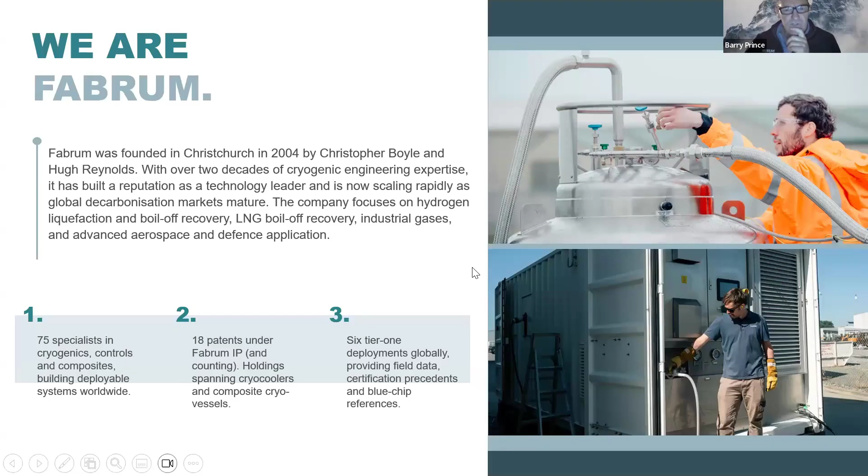So just to give you a bit of an idea of the sort of work that we do in the hydrogen space and our expertise, I'm just going to show a recent project that FABRUM was involved in. So this is a bit of drone footage from a mine site in Western Australia. The client for this project is a company called Fortescue, a big iron ore mining company based in Western Australia. They wanted to demonstrate that they could decarbonise their mine site. Specifically, they wanted to demonstrate they could run their big haul trucks on liquid hydrogen. To do that, they needed a liquid hydrogen liquefier on site.

So Western Australia is a fairly remote place. Perth is the capital city of that state of Australia. Perth is the most remote city in the world. And this mine site's about 1,000 kilometres north of Perth. So very remote location, very punishing environment. The temperatures regularly go above 50 degrees Celsius, and it's a very dusty environment.

So what you're looking at in this photo, in the background under that canopy, are electrolyzers. They're being fed electricity from a solar array, so they're producing green hydrogen. That's fed through a pipeline to the plant at the front here. That's the hydrogen liquefier that was designed and manufactured by FABRUM. So all of the cryocoolers that are doing the cooling of the hydrogen are in the 3 containers in the foreground, and the containers just behind that have all the heat rejection and control systems.

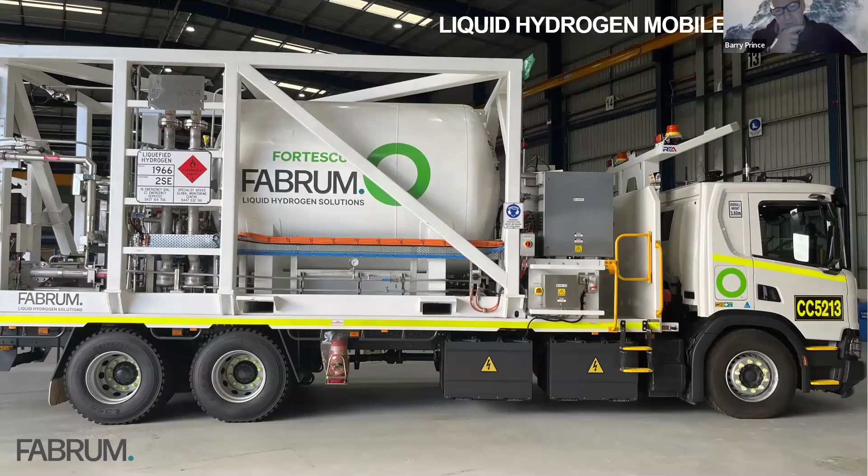And the primary vehicle that it is refueling is this. This is a liquid hydrogen mobile refueler. It carries about 600 kilograms of liquid hydrogen, and it has all of the infrastructure on board for doing liquid transfers. It's built into a standard 20-foot ISO frame, so it can be easily transported or relocated. And this vehicle will then refuel liquid hydrogen into a couple of other vehicles.

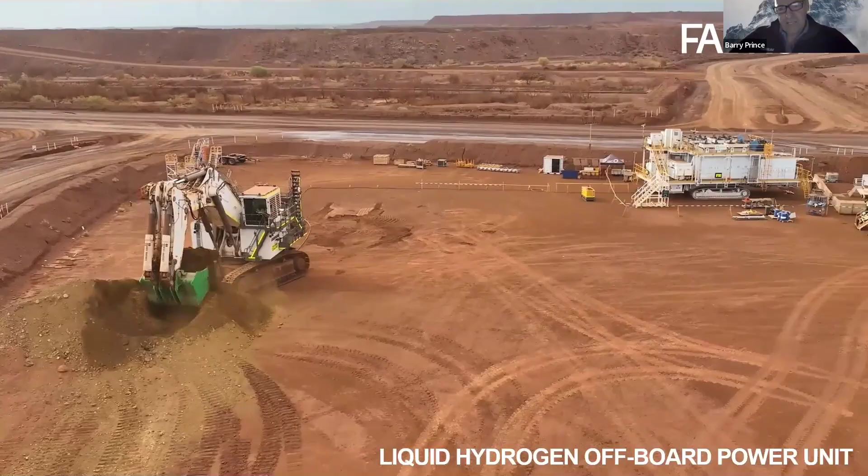Firstly, the vehicle on the right-hand side of this, it looks maybe a bit more like a building than a vehicle, but you can see it's on tracks there. It can travel around behind the excavator on the left. That excavator is 100% electric powered and, difficult to see, but there's a big power cord running along the ground to the vehicle on the right. That's called an off-board power unit, and the off-board power unit has storage of about half a ton of liquid hydrogen that is feeding fuel cells, producing about 1.3 megawatts of electricity to power that electric excavator.

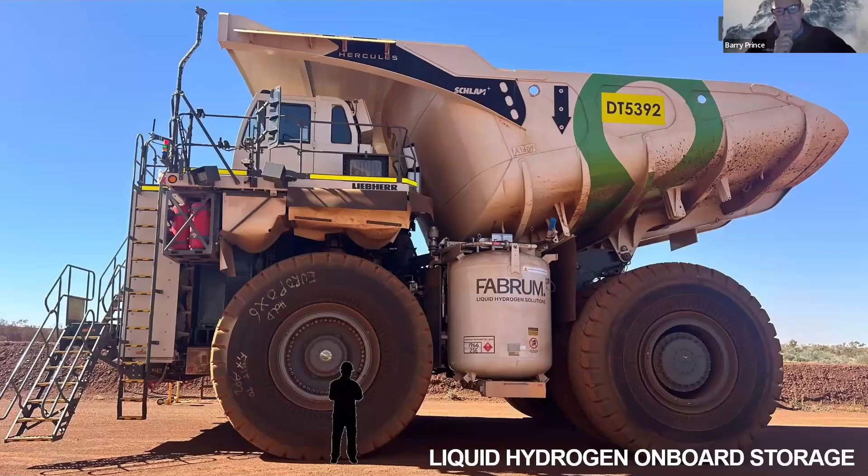But ultimately, this project was about proving these trucks could run on liquid hydrogen. So this is a 300-ton haul truck. This truck would typically consume about 2.5 to 3 tons of diesel in a 12-hour shift. This truck running on liquid hydrogen will do that 12-hour shift by consuming about 500 kilograms of liquid hydrogen. And that hydrogen is stored in 2 of those FABRUM tanks, one on each side of the vehicle.

And so, as I say, this is quite a nice demonstration of the sort of work that FABRUM gets involved in. Everything in this project that had anything to do with liquid hydrogen was designed, manufactured, and deployed by FABRUM. So that includes the hydrogen liquefier plant, all of the liquid storage, the liquid transfer systems, dispensing and refueling systems, onboard storage, and the storage delivery systems.

So if you look at the products that FABRUM manufacture, they're largely underpinned by 2 technologies that the company has developed. So I'm just going to talk about them on this slide. So firstly, on the left, we have a proprietary cryocooler. In the middle of that circle, you can see that cryocooler. It's essentially a very powerful refrigerator, works on the same principle as your domestic refrigerator at home, compressing and expanding a refrigerant gas, but much more powerful. And that underpins all of our products that deliver cooling power. So it's nitrogen and oxygen liquefiers, it's natural gas liquefiers and boil-off gas management systems, and of course our hydrogen liquefiers and boil-off gas systems.

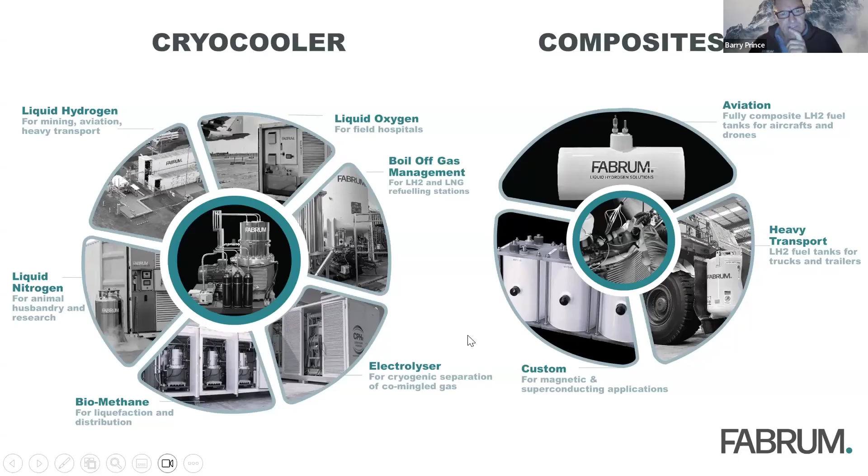On the right-hand side of this slide is the other core bit of technology that FABRUM has developed, and this is manufacturing techniques that enable us to build these super lightweight storage vessels for liquid hydrogen. That, of course, is what we're going to get into in a bit more detail as we roll through this talk. So before we get onto the tanks, what are the other products around the cryocooler that FABRUM are producing? Because these do also have some relevance, as we'll see, in the aerospace sector for hydrogen powered flight.

So firstly, the hydrogen liquefiers. We've talked about the larger one at the top left of this, the system that's installed in the Pilbara in Western Australia. To the right of that at the top is a system built into a 40-foot shipping container that will produce up to 75 kilograms of liquid hydrogen a day. That system pictured there is currently being installed in Germany at the Karlsruhe Institute of Technology at their energy lab. In fact, it's at the heart of their energy lab, producing liquid hydrogen that's underpinning all of the R&D that they're doing for cryogenic hydrogen at that site.

Bottom right is a smaller scale liquefier that we produce. We call it a development scale, and it can be configured to produce from 3 to 20 kilograms per day. The liquefier pictured there is operating in Kemble, Cotswold Airport in the UK, actually the site where ZeroAvia are based, and that's been operating for a few years there, producing liquid hydrogen that's supporting the development of technologies for liquid hydrogen in aerospace.

And finally, on the bottom left is a system that's in a 20-foot container. It can operate as a liquefier and produce 30 kilograms a day liquefaction rate. Actually, this system uses a different technology to the other liquefiers on this page. And so as well as operating as a liquefier, this can operate as a reliquefier, okay? The difference being the temperature of the hydrogen that is being supplied to the unit. So a liquefier is taking hydrogen from ambient temperature down to the condensation point. A reliquefier is taking boil-off gas, so it's taking cold hydrogen that's in gaseous state and just dropping the temperature a smaller amount to recondense it, and so that's a boil-off gas management system.

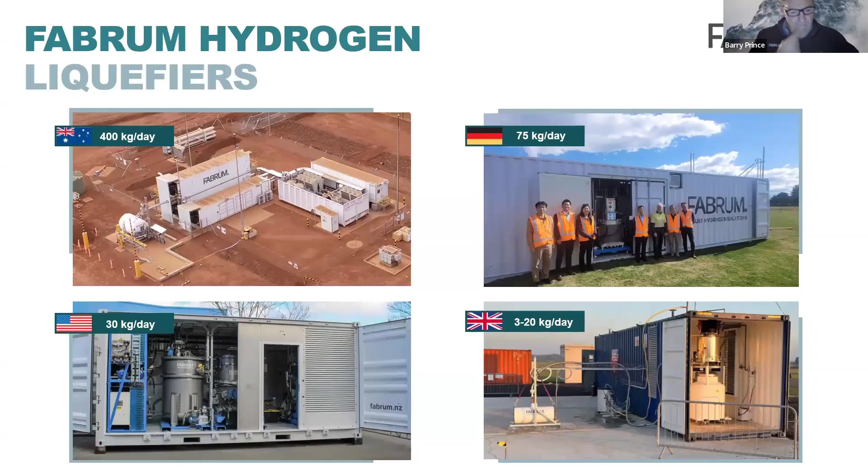So there's two main sources of boil-off gas in that space, and that's the normal evaporative rate of the liquid hydrogen storage tank, but also the cryogenic pumps that are used to compress hydrogen to boost the pressure for refueling produce low pressure hydrogen gas that needs to be managed, and that's what that unit is doing. And I think we've got another picture of that system here that talks about boil-off gas management.

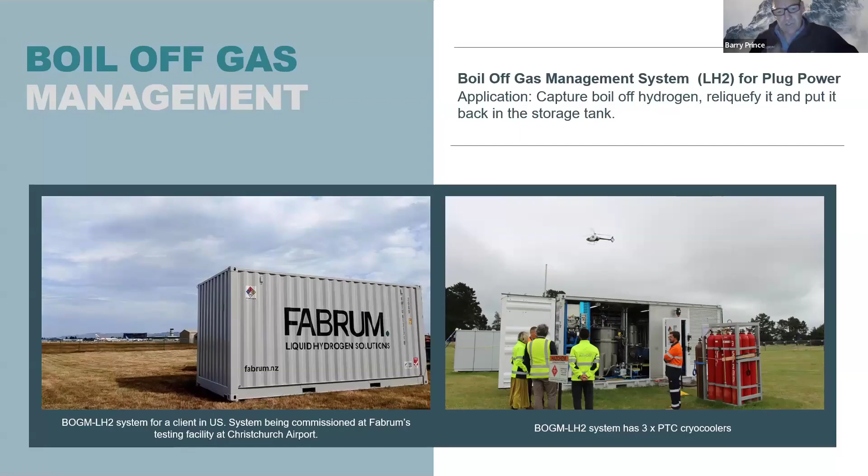So these systems, both the liquefiers and the boil-off gas management, have, as I say, some relevance to aerospace applications, in the sense that these can be deployed in the field, right? They can be deployed at the point where liquid hydrogen is being refueled or is being dispensed. And so having cooling power at those locations gives you a lot of options and more flexibility to build an efficient liquid hydrogen system. One of the big challenges we all know with managing and building liquid hydrogen systems is managing the boil-off gas and building an efficient system where you don't end up venting large quantities of hydrogen. So having the ability to deploy cooling power at the sites that the hydrogen's being dispensed or being used gives you some flexibility to support that.

All right. So that's the cryocooler technologies. And then the other technology, of course, is the composite tanks, which is the purpose of the webinar today. So we're going to dig into this, and FABRUM builds a range of composite tanks for mobility applications that really care about lightweight tanks, right? So it's primarily in aerospace, but also for motorsport applications. There's a lot of interest for these tanks. So we manufacture conventional double skin cryogenic tanks where there's a liquid containing vessel that's a pressure vessel surrounded by a vacuum jacket for insulation.

In addition to that, FABRUM has a patent for what we call a triple skin tank, and that overcomes a couple of the major challenges with a cryogenic fuel tank with regard to the efficiency with which the tank can be refilled, particularly from ambient temperatures. And I'm going to explain a little bit more about that triple skin tank in a minute.

But before we dig into these tanks, I just want to step back a bit and talk a little bit about why we care about this. Is there really a future actually for hydrogen and liquid hydrogen in aviation? And how important are these tanks for this? I don't want to belabor the point for this audience. I think we're all fairly well versed in these arguments, but it's maybe interesting just to look at the arguments through a slightly different lens. So let me just touch on this quickly.

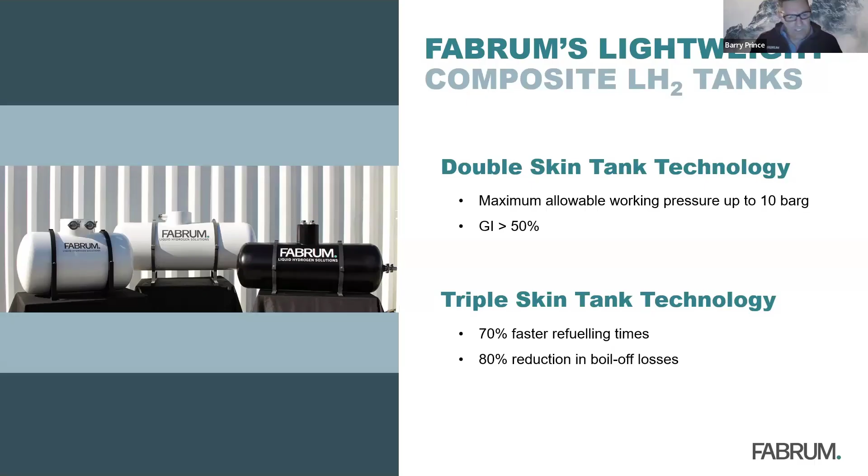Firstly is the question: is there really an economic argument that there is a place for hydrogen flight? And this is a slide that I've always found makes quite a compelling argument for this. This slide was put together by an Australian company that's developing hydrogen-powered flight, Stralis Aircraft. And the graph on the left, you can see the vertical axis is the cost per available seat kilometre, and they've mapped that out for a couple of their versions of hydrogen-powered aircraft compared with Jet A fuel for a Dash 8, for example.

And you can see, depending on the price of your liquid hydrogen, you can make an argument that you can run a lower cost operation than using fossil fuels, right? Depending on the price of the liquid hydrogen. But if liquid hydrogen can meet the price points that are being projected, certainly in the range of, say, 2030, then these arguments really stack up.

The thing that I find very interesting on this plot, though, is that histogram. You can see that's the passenger traffic histogram. And what that shows is 50% of all CO2 emissions from air travel arise from flights under 2,200 kilometres. So right in the sweet spot where these hydrogen-powered flight technologies are going to be operated, right? So there is clearly a place for liquid hydrogen powered flight if these technologies can be brought to fruition.

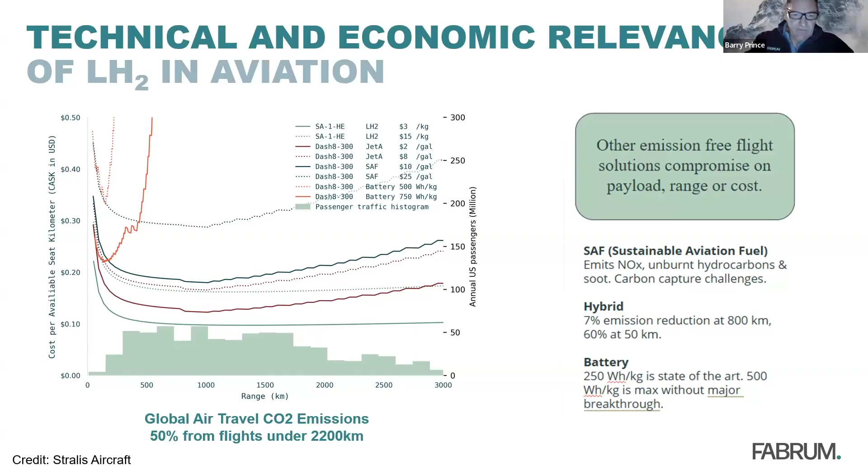Why does it have to be liquid hydrogen as opposed to other forms of hydrogen? Well, that comes down to the question of specific energy. And again, this is a plot that is shown in different forms that makes that point. And so what this plots is the specific energy, the energy per kilogram of your fuel system, versus the horizontal axis, which is the energy density, how much space your fuel system takes up.

The critical metric for aviation, and not just aviation, all of the hard to abate sectors we're talking about, mining, aviation, heavy transport. Why are these sectors called hard to abate? It's because they rely on this characteristic of fossil fuels that it has a very good specific energy, right? And it's very difficult to find an alternative fuel for that.

Batteries have come a long way compared to old lead acid batteries. When you look at lithium ion batteries in terms of the specific energy and the volumetric energy density of those, they've improved orders of magnitude, but they're still a long, long way away from competing with fossil fuels. It's not to say there's no place for batteries, but with regards to this specific metric, they've a long way to go.

So as you can see on this slide, liquid hydrogen is really the only zero carbon fuel that can outperform fossil fuels with regards to this metric, this specific energy. But it doesn't happen as a matter of course. What this plot shows is not just the specific energy of the fuel itself, but the entire fuel system, the storage and the fuel delivery system.

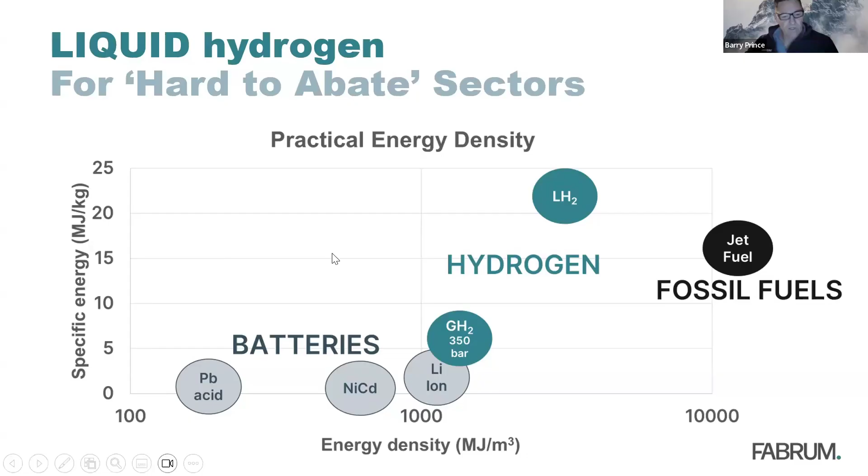And so that's why composite tanks are of so much interest. What are the properties of the composite tanks that really attract? The key ones are related to that weight, right? The two graphs on the left-hand side: the density of composites is much less than metal tanks, so it's lighter, but still has very good tensile strength, much better than metal tanks.

And the thermal conductivity of composite is much, much lower than metal. So the thermal performance of a composite cryogenic tank will outperform a metal tank. But also the composites, with regards to the number of pressure cycles that they can undergo, far exceed metal tanks, by up to a couple of orders of magnitude over metal tanks for the number of pressure cycles.

Now, it's not to say that there's no challenges with building cryogenic tanks, particularly for hydrogen. Composites, by their nature, are known to be quite porous, and hydrogen, of course, is the smallest molecule. So managing the permeation of hydrogen through these vessels is an important part of developing these tanks, and also understanding really the lifetime of these tanks, not just with regards to pressure cycles, but pressure temperature cycles. They'll be cycling temperature from ambient to minus 250 degrees, right?

So there's a challenge there, but there is a growing body of knowledge around these challenges that's being developed not just by FABRUM, but by others around the world, and that growing body of knowledge is showing that these challenges can certainly be overcome. They're not showstoppers. Fair to say that I think there's an acceptance that cryogenic fuel tanks on vehicles will be composite. Composite will be the material of choice in these sort of applications in the future.

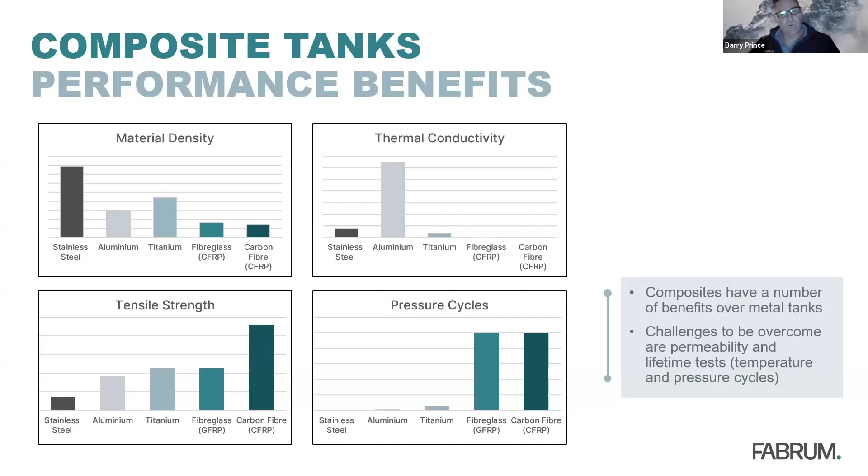And actually, as we've heard in other high sky talks, the best outcomes are achieved when you look at the tank holistically with the whole system. So rather than developing a system to a point and deciding what are the characteristics of the tank that you need to fit into that, you really want to look at the tank along with everything else from the get-go. But first, let's look at some of the considerations for a composite fuel tank. I'm going to start with the operating pressure.

And the key point here is the headline of this slide, that the real benefits of liquid hydrogen are achieved at low storage pressure. The basis for this is the relationship between the density of hydrogen and the applied pressure. The density at the saturation point, right? So hydrogen has this, I've always thought, a little bit counterintuitive property where it essentially swells up: as the applied pressure increases, the density reduces.

It's not actually unique to hydrogen. You can see on this chart, water and nitrogen and methane all have the same characteristic, but it's more marked for hydrogen, and it's pretty significant. If you're operating a liquid hydrogen tank at 3 bar gauge, you'll have a density of 63 grams per litre, thereabouts. If you're operating at 10 bar gauge, that drops a fairly staggering amount down to 47 grams per litre.

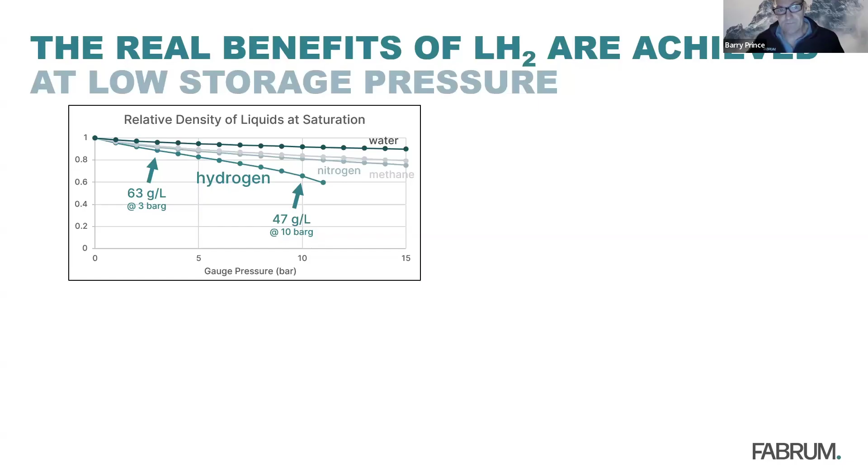So what does that mean? Firstly, it means that for a given volume of tank, you've got a lot less fuel on board, right? But not only that, because the tank with less fuel on board is also containing a higher pressure, so it needs to be heavier, right? So if we were going to build a composite tank with 40 kilogram capacity, if we were building that to operate at 3 bar gauge, it would weigh about 50 kilograms. At 10 bar gauge, you're looking at maybe 90 kilograms, that sort of range, right?

So both of these things act together to the detriment of the gravimetric index of your system, the mass efficiency of the system. So you have this double whammy effect. And so the gravimetric index for our 40 kilogram capacity system operating at 3 bar G would be somewhere near 45%, which is to say 45% of your fuel system is fuel, right? But at 10 bar gauge, that would drop to about 30%. So pretty significant. So if you can operate at lower pressures for your liquid hydrogen storage, you have some significant benefits in the gravimetric index of your fuel system.

All right, so the second consideration I want to talk about is the dormancy. So dormancy relates to the amount of time: if you fill a cryogenic fuel tank at low pressure, it can sit there for a period of time, building pressure until it will ultimately hit a relief pressure and start venting hydrogen. And that's the dormancy period, the time between filling to the time that you start venting hydrogen. And people care about dormancy because you don't want to fill a liquid hydrogen powered aircraft and then have it sitting on the runway having to vent hydrogen.

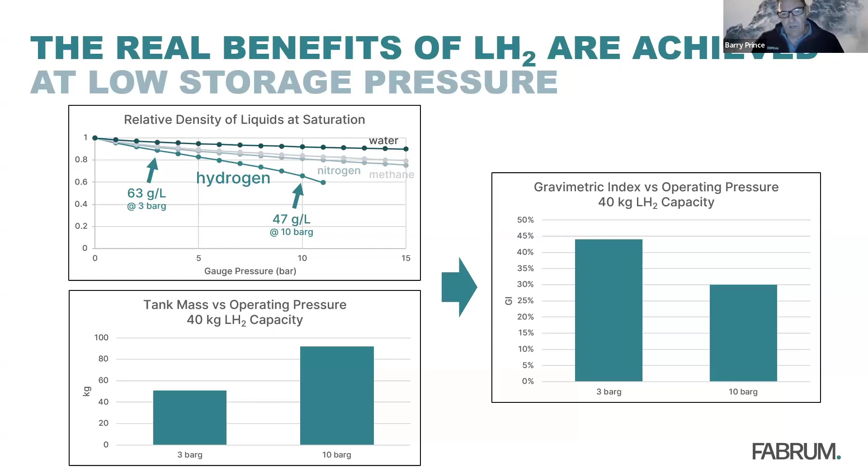If you imagine a system, we're looking here again at a 40 kilogram capacity composite tank, and let's say it's on a system that's feeding a 120 kilowatt fuel cell. If we were to design that tank, it could easily have a 10 watt heat leak, and that would give it a dormancy of 48 hours. But you only care about that until the point that the fuel cell is being fed by hydrogen.

Okay, the amount of heat that you need to put into the tank to deliver hydrogen to a 120 kilowatt fuel cell is orders of magnitude more than the heat leak that the tank has. So you're going to be putting in 750 watts just to evaporate the hydrogen, and then another 8.5 kilowatts to bring it up to the temperature needed for the fuel cell, right? So the point here is, as soon as you're operating the aircraft, you don't care at all about the heat leak of the tank, right?

So it's important to design the heat leak of the tank that matches the use case of the tank. Okay, as soon as you're operating, you don't care about the heat leak, so you don't want to be carrying around extra weight in your tank that is giving you a dormancy period that's actually not being utilized.

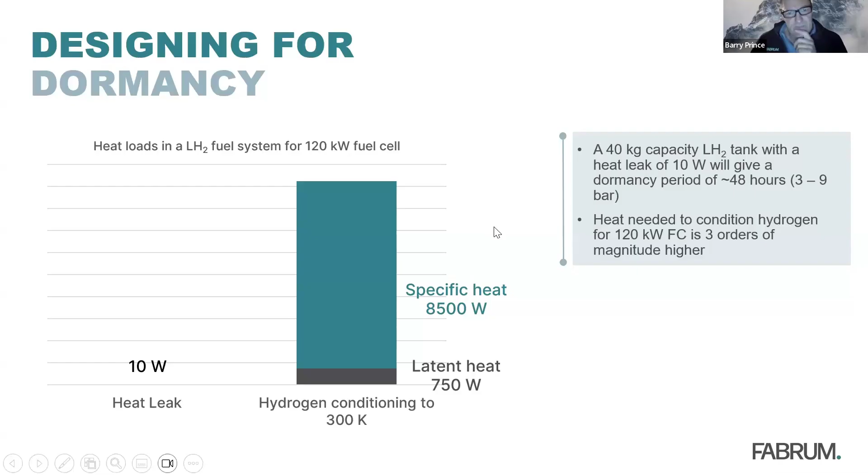All right, so let's talk a little bit about refueling of these tanks. For cryogenic fuel tanks, it's particularly important when you're refueling from ambient temperatures, right? So a particular challenge when refueling a cryogenic tank from ambient temperatures is how you can do it efficiently, how you can fill it quickly and minimize the losses.

So typically, you would take a fairly extended period to fill a cryogenic fuel tank to slowly cool the vessel that's going to contain the liquid hydrogen, so that you don't thermally shock the tank. In the same way that if you pour boiling water into a cold glass, you can crack it. You need to change the temperature of these tanks slowly, and particularly for a composite tank, although it applies to metal tanks as well, you can thermally shock those.

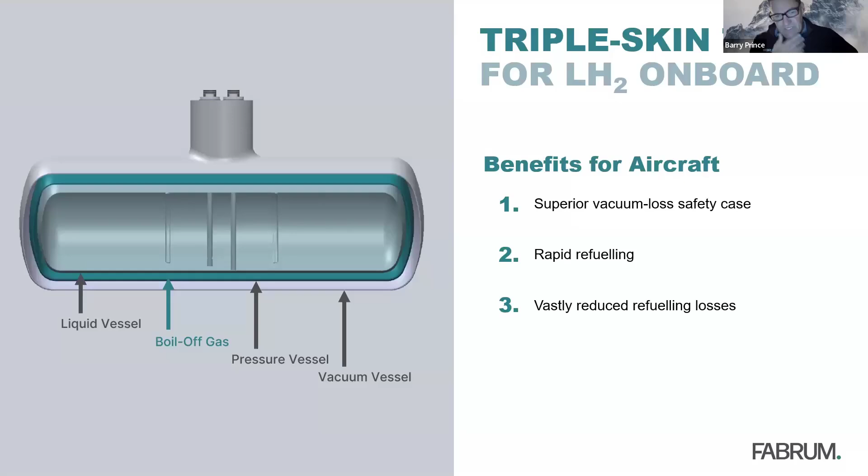And in fact, the preliminary tests suggest that the heat load on that tank would not even exceed the heat load that you would deliberately be putting into the fuel tank to drive the hydrogen out to feed your fuel cell or your engine. So let's just have a bit of a closer look at how the refueling efficiency works.

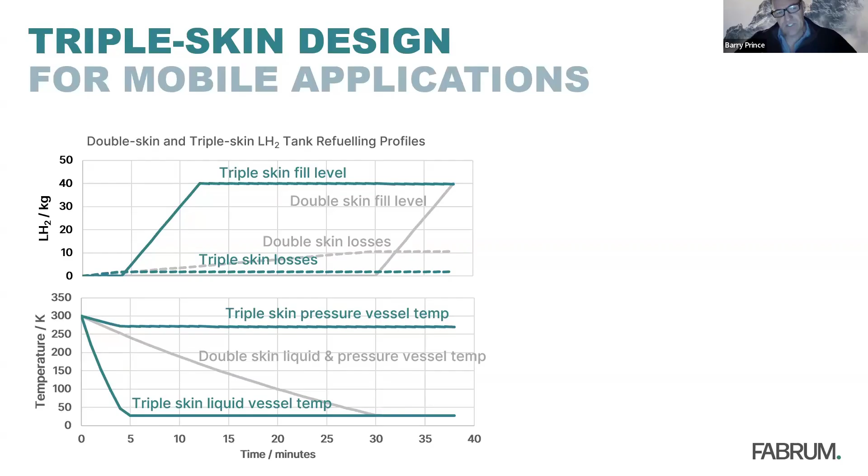Now, if you look at the top chart, you can see the same effect as for the double skin tank. The losses that you're getting really only occur during the cooling of the liquid vessel. So over that short first period, and then they level out, right? You start filling the tank after 5 minutes when you've cooled that liquid vessel. So overall, the refueling time is much, much faster, maybe 3 times faster on the triple skin tank compared to the double. And the losses of hydrogen in refueling are even more significantly better, more than 5 times reduction in losses.

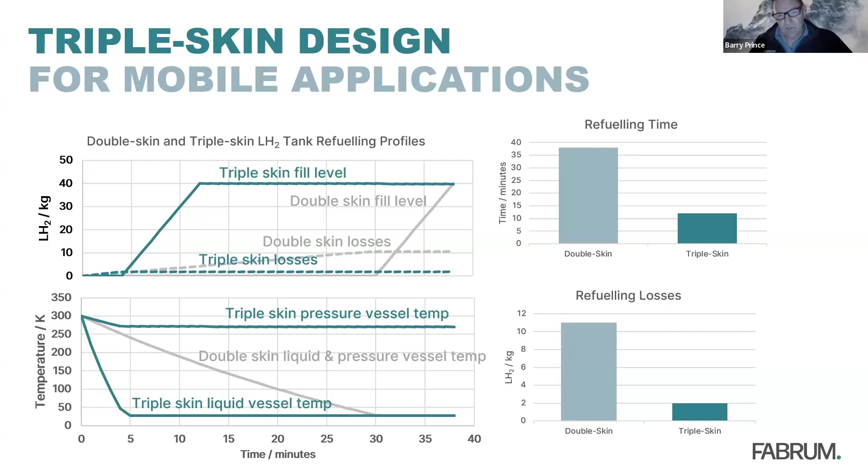But even before that, the refueling, where the hydrogen is produced, and the impurities in the hydrogen, those sort of things can play a part in this, but particularly the hydrogen liquefaction. Is the hydrogen liquefied remotely and transported to the point that it's being refueled, or is it being liquefied at the site that it's being dispensed, right? If you're liquefying hydrogen at the site that it's being used, that gives you a lot more control over the state of the hydrogen that's going into the aircraft, whether it's subcooled, what the saturation point is, and so on. So that can be a key factor in the design of your onboard systems, right?

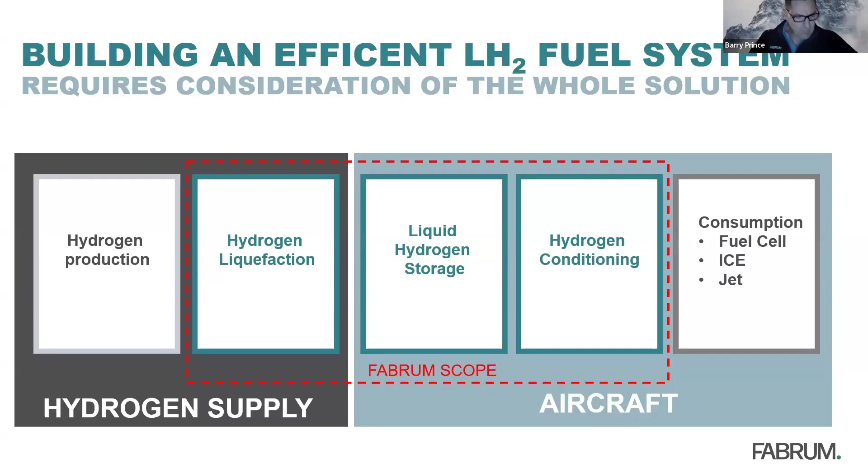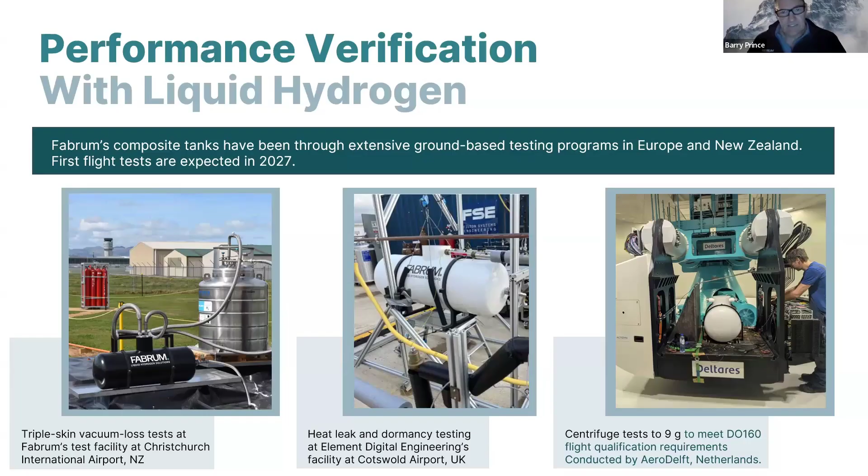All right, so the final thing I want to talk about is another initiative that FABRUM is launching down here in this part of the world. This picture here is a photo from a temporary liquid hydrogen test facility at Christchurch International Airport. And later this year, we're establishing a permanent liquid hydrogen test facility at that site. This site will have a hydrogen liquefier that can produce from 50 to 100 kilograms of liquid hydrogen per day.

The site will support the development programs of these composite tanks and other liquid hydrogen technologies that FABRUM is developing, but is also available for the use of other organisations that need access to those quantities of liquid hydrogen and facilities where they can conduct some testing. It's actually part of a wider initiative by a group of organisations in this part of New Zealand that are working to develop a hydrogen ecosystem.

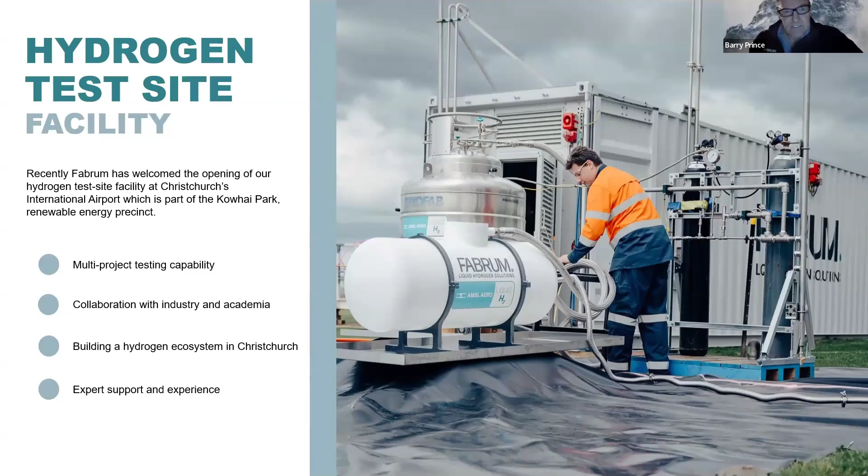So if any of you are looking for an excuse to come down and visit us in New Zealand, maybe this is the excuse you need. We'd love to see you down here.

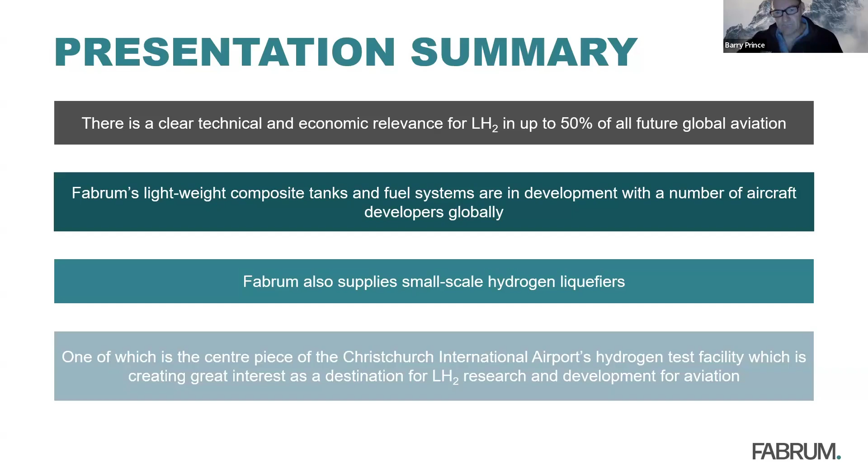And also the small scale hydrogen liquefiers can play an important role in making these overall systems as efficient as possible. And finally, the liquid hydrogen test facility that will be up and running here in Christchurch by the end of the year will play an important role in the acceleration of the development of these technologies to enable liquid hydrogen powered flight both in New Zealand and around the world.